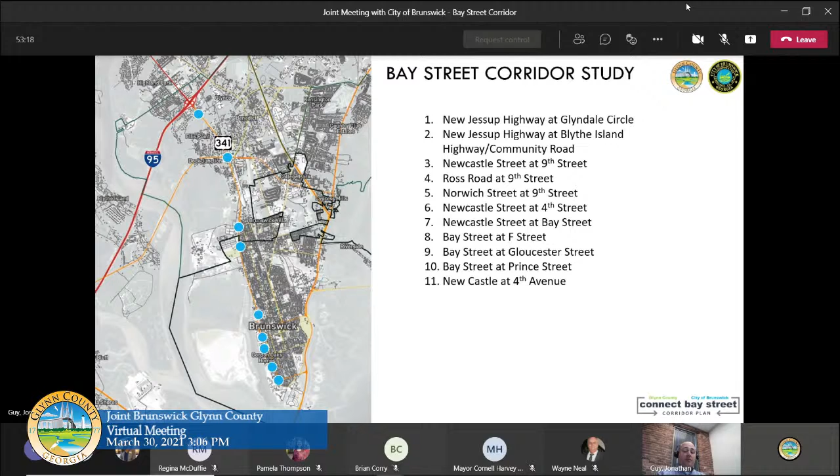So let's talk a little bit about traffic volumes. This information was provided by the Georgia Department of Transportation, based off 2019 numbers. The average daily traffic volumes range from 23,000 up near the interstate, which is not surprising considering the connection with 95, and then start to taper as you get down through the corridor as you approach downtown. You can see it's still a significant volume as it starts to approach downtown.

The volume splits at that point, which is why you see about 6,000 vehicles per day peeling off toward Brunswick. The rest is coming into Newcastle, into the heart of downtown. Then there are some smaller volumes as you work your way in and around, and ultimately coming back over to 17 where you see those volumes come up.

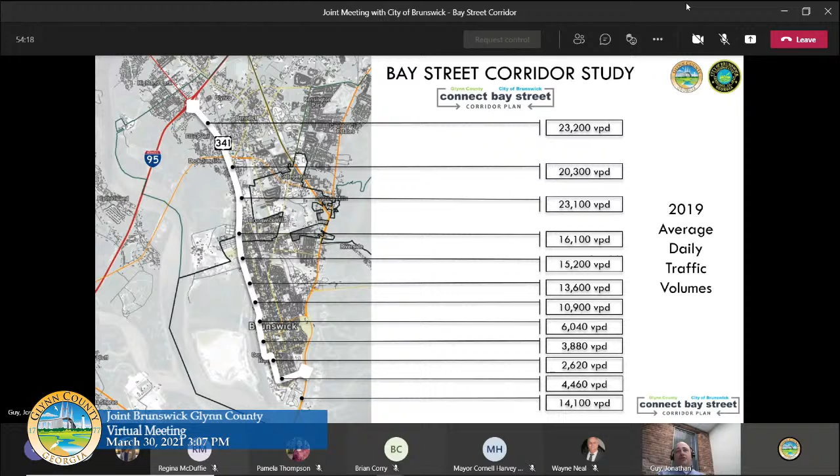A lot of that has to do with the interconnectivity. It has to do with where volumes are ultimately trying to go. Are they trying to head to the islands? Are they trying to hit the terminal? Are they trying to go to downtown? Where is their destination? That's important.

So as we think about that, let's look at some of the crashes along the corridor, because this also tells a story, as well as the volumes that are out there. Not surprisingly, remember those volumes up towards the interstate with 95 - you've got a lot of drivers that are new to the area, either just hopping off the interstate or using this to connect over to a different destination, as well as Old Jacksonville Highway as you're coming in. These two areas show the predominant amount of crashes in the corridor, but you also have others throughout as you work your way in and around. Total of 721 crashes along the corridor.

There is a very small percentage that is serious injuries. As we start to look at the manner of the collisions, it's interesting to look at what that tells us as well - rear ends are predominant, as well as left angle crashes. That tells me, looking at that in conjunction with the angle crashes, you've got congestion in the corridor, maybe a little bit of driver unfamiliarity with the corridor conditions or the laneage that's out there, but also congestion - that's the main thing you're seeing.

And those are concentrated in locations where we have observed, and the traffic volumes tell you based on operational analysis that you've got congestion at those locations.

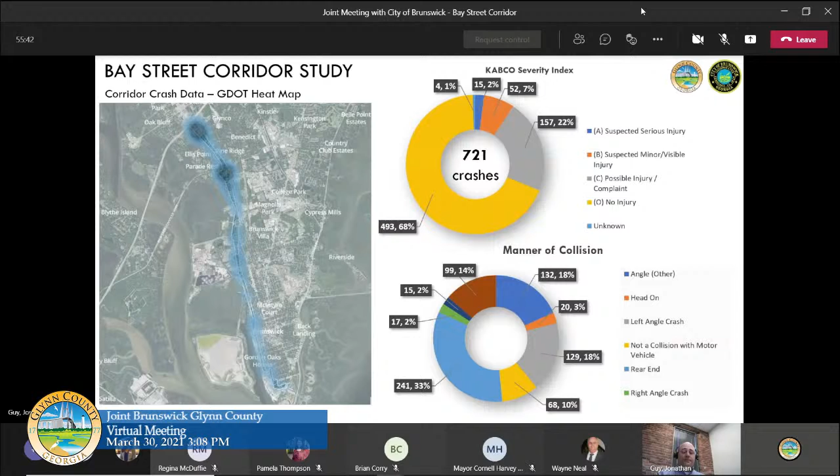As I was talking earlier about mobility through the corridor, I wanted to highlight some of the destinations or the corridor influencers or attractors that you see there. This is a mixture of different things - it includes downtown, as well as the causeway over to the islands. That's important because it tells a story relative to how people move through your network.

This is a very long corridor. It has a very broad range of context areas. We go from industrial areas - you have a port, you have a historic downtown, you go through neighborhoods. You also deal with just general business commercial corridors.

Because of that, you've got a variety of different land uses that are out there, from heavy industrial like the pulp mill, you have the terminal, but you also have other places that are drawing people in, and it may not be a singular destination - that's why I have the causeway to the island.

You've got individuals who may choose to take, if they're coming from the south, over the new bridge on 17 to connect up. You have others coming from the north who are choosing to take different connections around. All of those are attractors, but it all influences how both the crash patterns occur with collisions, as well as volumes moving through the corridor. That's important for us to understand as we talk about some of the things that we're seeing.

I think it's also important to highlight the fact that this corridor, 341, is a GRIP corridor, which is the Governor's Road Improvement Program. Now, this goes back a long way - I wasn't even a practicing engineer at that time. But if you look, what were their goals?

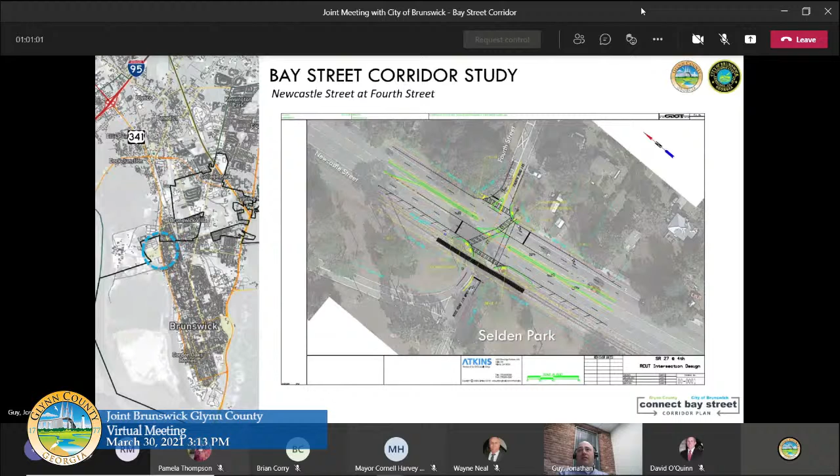I'll give some feedback and alternatives to consider. One of the first things - while the Z crossing, which you can barely see in the background here, is one way to connect people across - if you're looking at minimizing time at risk, meaning the time you are in the through lanes conflicting with traffic, I like to minimize that as much as possible. So one modification we'd recommend is to remove the left onto 4th Street. There are connections both north and south that work you into the street grid. The reason is to provide the left into the park access, but also to give individuals crossing the road, should they not make it in the time allowed for the HAWK signal, a place to pause.

Or to go all the way across and cross. It minimizes that conflict point. It makes it a more straightforward crossing if you're looking at those who may be visually impaired. A nice waiting area through here for pedestrians to stage should they need to be staged.

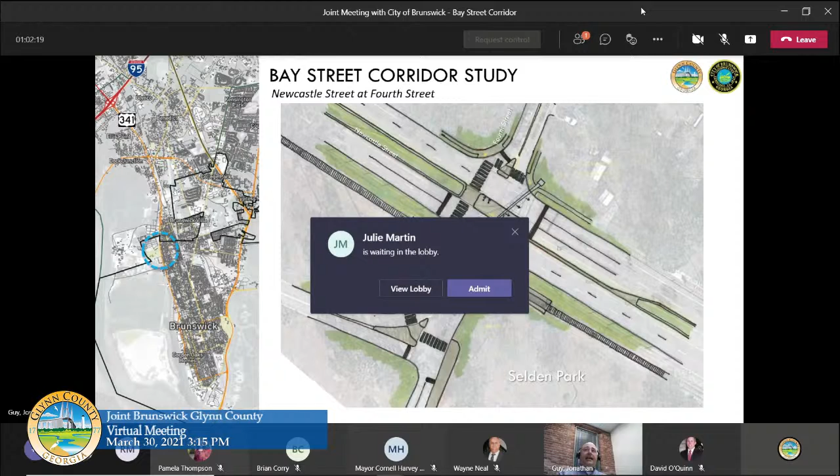I will tell you, in looking at this and looking at the traffic volumes, while we did show a little bit of delay on the side street, that is not uncommon to see on any side street where you've got a multi-lane facility. What I will tell you, though, is that the volumes do not come close to the level that needs to be there for a traffic signal. So as a part of this, we would not be recommending a traffic signal.

Now, we would look at the potential for a HAWK signal here, which gives priority to the pedestrian. It works in the same manner as a traffic signal in that you do stop traffic. So you create a safe crossing at this location. It is pedestrian activated, with push buttons on either side to cause it to go into flash, stop traffic, and then ultimately allow the pedestrians to cross.

Understanding the importance of this for the community and for the street grid, we modified this a little bit, taking elements from the GDOT plan originally, and then my recommendation, which was the straight crossing of the neighborhood. What we did is slightly modify the crossing location associated with Ross Road, bringing this intersection in a little more streamlined.

It brings the pedestrian straight across, again looking at a HAWK signal at this location to control traffic and allow that crossing. We'll be able to stop this traffic and this traffic. Since there's not necessarily a conflicting movement with the HAWK, this crossing traffic would not stop - it would be a stop sign, but not under the provision of the HAWK in this configuration. This does allow for that left turn, but it doesn't allow left turns out. I understand that for some people that may be concerning.

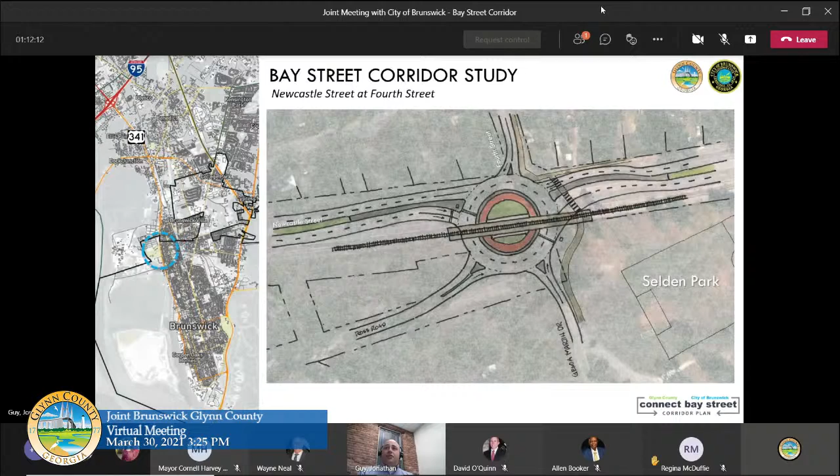Well, I mean, you just said that it would be less costly than moving it, but I understand what you're saying about the railroad, okay, thank you. Yep, absolutely. Any other questions before I'll go back to where I was at, down at Newcastle? Just make sure we answer questions. I apologize, didn't see the hand up.

All right, let me jump down here and we'll talk about this intersection. This is another alternative to move traffic. One of the things we heard in stakeholder conversations is potential development on the waterfront side of the railroad tracks over here. So looking at that, how do you provide access? How do you create mobility in between these two?

This is a quick sketch we've pulled up, and each of these two roundabouts are being formalized a little bit more, as well as the one up at Selden Park, in greater detail so it's better communicated. Looking at the potential for a crossing there, adding that fourth leg into the intersection, maintaining the mobility we're looking for, creating the gateway, creating the circulation we need. This is another way to bring it into control.

Now, this does have the same complications as it is crossing the railroad track, which brings up another level of coordination. But it also means that in any evaluation of this, if it were to go forward, you would probably look at closing the additional crossing down here if you wanted access at this location. Bringing it into the roundabout brings it into the control, also gives you an opportunity to bring pedestrians in, and you start to create this corridor on either side.

One of the things that the mayor and I had discussed at some of our breakfast meetings was being able to connect Mary Ross Park with the downtown district. And when you look at the traffic counts presented earlier in this presentation of how low the traffic counts get once you go through this split on Bay Street, is it possible that we could downsize or at least do a study about downsizing the 4-lane to 1 lane in each direction, increase parking for downtown, and provide a softscape for crossing from the library area at Gloucester Street across to Mary Ross Park to make it more friendly there?

That's a good question, and I'm going to get to that as we get into the presentation. I'm going to walk you through a series of what we've talked about, so I don't want to spoil the results. Give me just one minute. I'm going to talk about one more intersection, and then we'll jump over to that one, because I figured that would be a lot of the conversation today and essentially what our findings have been.

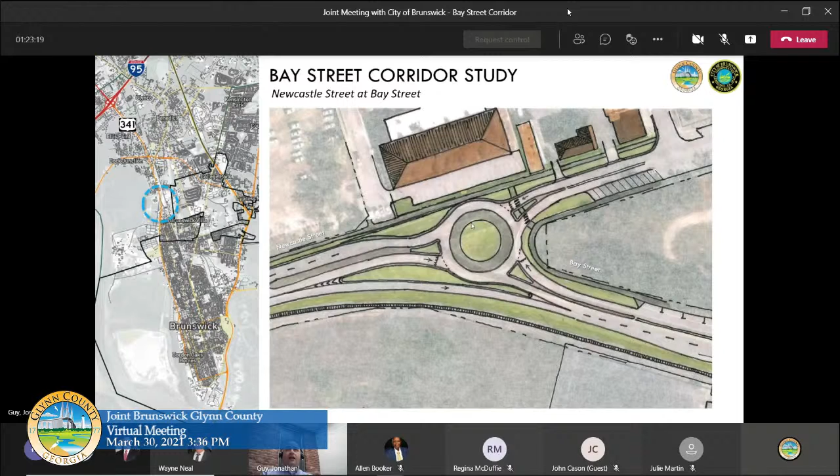So I'm going to back up and talk about this intersection over here. This is one of the polar intersections, again the terminal point to the east, the intersection of 4th and Glynn. Looking at that intersection again, it's a major parallel corridor to downtown, which is 17, intended to provide that southern connection up to the causeway to get you over. It has some very unique geometry, just like some of your other intersections.

Lefts crossing over, lefts merging with exiting traffic. When you start to look at the volumes, you see that while there's not very heavy traffic coming off 4th Avenue onto Glynn, it is a significant volume at that intersection. One of our recommendations is, because the volume on 4th is somewhat smaller than what it needs to be, it's not at this point, or in any of our projections, going to get to a point where you'd warrant a traffic signal at that location.

But a roundabout does help to provide that mobility. When you think about future connectivity of any sort of parallel boardwalk facility along 17, having access to come in not only here at 4th, but potentially to the north into downtown, connecting your residents to this, gives you that opportunity. Again, this is another one that fits within the geometry of what you've got out there.

I realize there's been some money recently spent on landscaping this location. We're not recommending this in the near term, but this would be something to look at in the future. Knowing you're going to be very hard pressed to warrant this for a traffic signal, and you're going to want to maintain a healthy speed through here, this would be a recommendation. This also cleans up some of the geometry, some of the funky lefts that come up and then back over, as well as this left exiting merging movement.

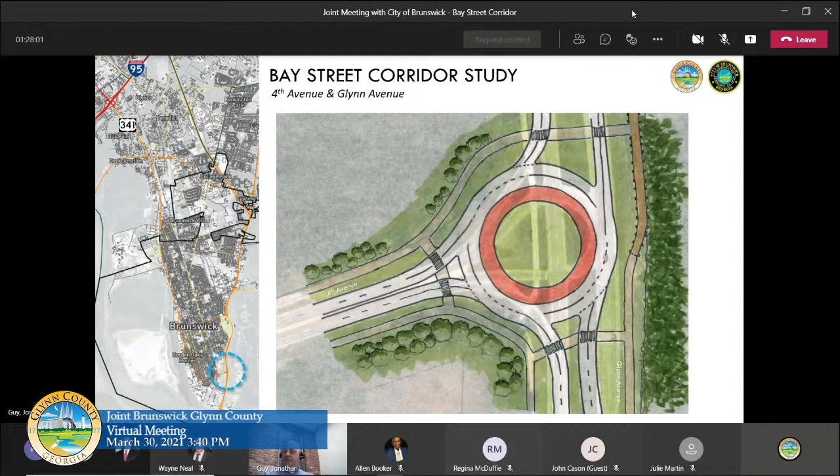All right, let's step through a couple other things, and I'll start to tell a story as we get into the downtown area, which has been brought up. So let's talk about that—Bay Street at F Street is one of the intersections we've looked at.

As you look at how that's going to grow long term, you see those overall growth volumes starting to rise through here—2 lanes in each direction currently, with an overall ADT of about 6,000 vehicles throughout the day, but still a very heavy vehicle percentage of 13.8%. That's a lot—typically for corridors not adjacent to industrial areas or terminals, you'd see somewhere between 2 and 4%. Understanding that is important because it affects operations and how traffic moves through a corridor, so it's important to consider that in our conversation today.

Talking about the next street down, Gloucester, and looking at operations—we've got a HAWK signal or rapid flashing beacon here. There's been some improvements from GDOT at this location to improve connectivity, and I was reading through the paper today about improvements being done, which was also shared with us by GDOT.

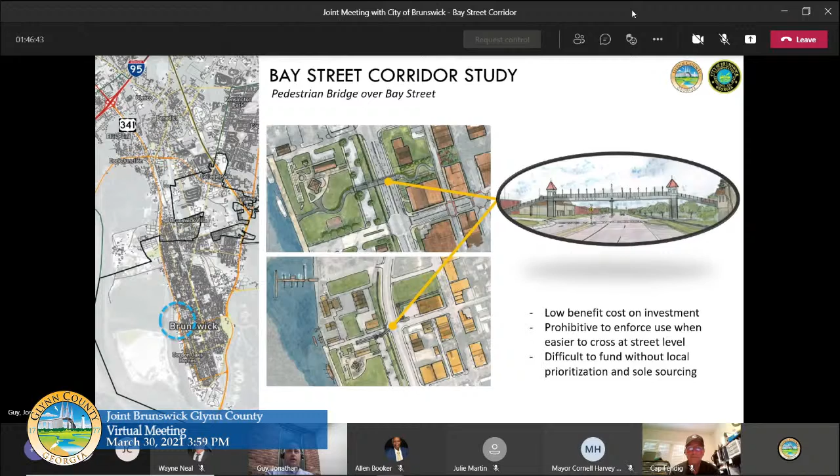Okay, thank you so much for the comments relative to that. Appreciate that. Let's talk a little bit about that. You talked about a variety of different things relative to the corridor, and we did work up concepts associated with that.

You can see a variety of different options that are shown there that look at unbalanced, balanced, multi-lanes in, single lane out, looking at the configuration. What I will tell you is, as you can see in the third bullet, there's no support at GDOT for implementation of that. And a couple reasons why: it's counter to the investment made through the GRIP program of maintaining this as an economic development corridor.

You've got the desire to have multi-lanes coming into the port. If over time the port does decide to change operations, to move, to look at other configurations, whatever they may do, I think there could be consideration for that in the future. At this point right now, I don't see that as a viable option for getting GDOT to implement, because again, we've got to remember, this is their road. They control this road. This is a strategic highway for them from a mobility standpoint. And as owners of the road, they have a say over this.

And I think that's an important factor, and I understand the desire of the connectivity. I understand where you're coming from, I don't dispute that. But I also understand the realities of where we are relative to ownership, and this is GDOT's road. I can tell you from their perspective that as you look at the corridor, we need to maintain smooth and effective operations. They see that from an economic development standpoint, as well as one of the largest generators of income for the state of Georgia, which is the Georgia Ports Authority. And so that has a say. Economics have a say in transportation.

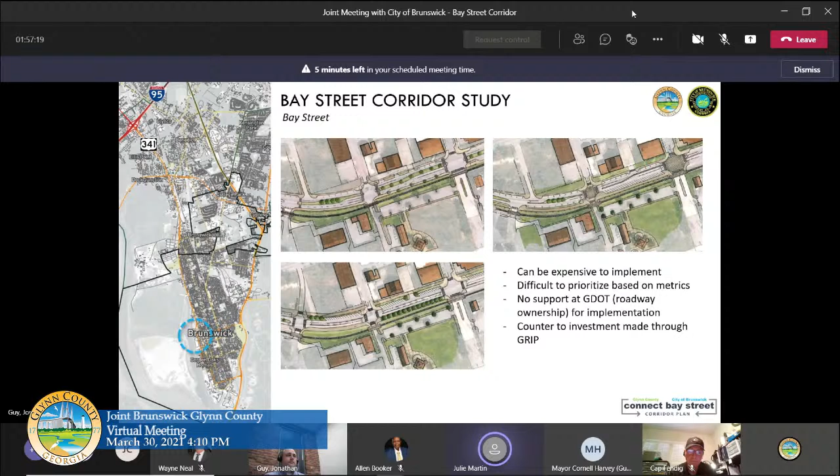Yeah, and I appreciate that. One of the other big issues we have, even with the improvements we had to push hard for—the flashing beacon lights, the sidewalk crossing over Gloucester on the south side of that intersection—once you get across towards the west, towards the park, the sidewalks do not align. So a pedestrian has to move out into the Gloucester extension, into the roadway, to reconnect with the sidewalk. That's one issue. The second issue is, if you look at the railroad crossing, there are huge holes.

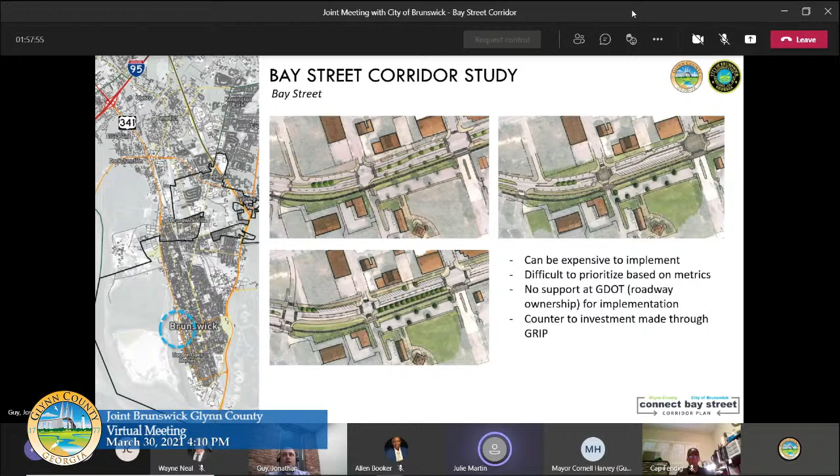So if you've got somebody pushing a stroller, a wheelchair, or a book cart from the library, which does happen, they can't navigate—their wheels are going to go in the hole every single time. It's pathetic. I think that's where, as you look at... let me get this to the screen here. I'll back that up, take that off. I realize what you're talking about.

The sidewalk actually resides right here today—it stops. As you come across here, there is some concrete, but what we would recommend, you can kind of see it here, is formalizing and channelizing this crossing, improving the smoothness of the rail crossing here for pedestrians. There are things you can do to improve that.

Protecting those pedestrians by bringing Gloucester down to a single lane exit and a single lane in allows you to make these improvements on an interim basis. This is concrete—it's easy to implement these channelized islands, and it creates that safe movement that's on grade, which is the other nice thing. There are things we can do without changing the curb right now. You could also do something more formal than this and make it grand.

But if you're looking at how do we do those interim things, which was one of the things we were charged with, this is one of the first ones I would look at doing: changing up the laneage on Gloucester on the west side. You only need a single lane, you don't need multi-lanes exiting through there. This still works for the trucks. There are some things we can do here to improve this, to create a two-stage crossing that would allow you to maintain the lanes that are out there, utilize the infrastructure already put in, but enhance it as it comes across and make a safer connection into the park.

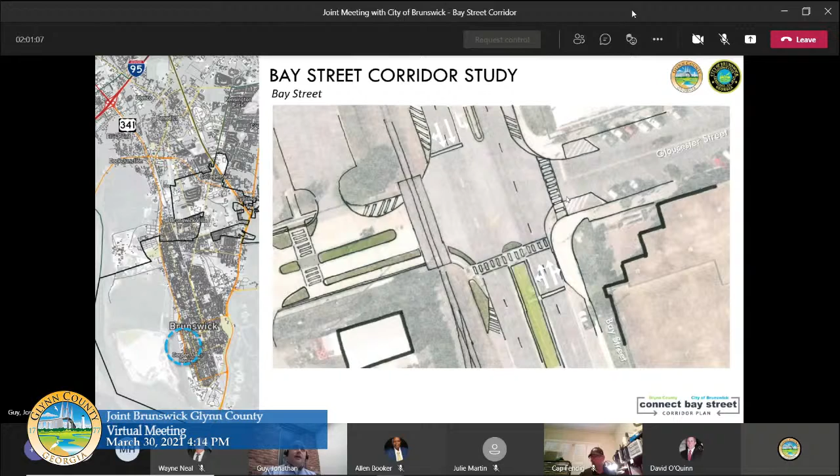Jonathan, this is David O'Quinn. Two things that were said earlier sort of struck me, and I was trying to put them together. One, you said that GDOT really doesn't want to see much change on Bay Street, if I understood correctly, because of previous investment towards economic development. Is that correct? Well, if you look at the priorities associated with the GRIP corridor, I'll go back to that original slide.

Oops, sorry, don't want to make anybody.

My question is this, and Commissioner Fendig spoke to it. Things change. And if we're talking about economic development, it's an important imperative that the downtown area of Brunswick, which could see significant economic redevelopment, have the opportunity to cross over to that park, because you've got lofts coming in downtown. It would be a great amenity for people living down there to be able to cross across the street safely, which is a draw for people down there, which helps bring business and whatnot. Why would that not be considered economic development? And if we're looking to make changes, why wouldn't that be considered?

Well, I can't speak for GDOT, and I'm basing this off of looking at their programs. If you look at one of the main elements in the corridor, that is the port. We can debate the health of that, I'm not an expert, so I'm not going to speak for that. But as they look at it from a statewide perspective, the port does provide a tremendous economic impact. It may change over time, absolutely, and I understand what you are saying as well. This is the intersection of local and state objectives, where you've got ownership of a roadway, other state entities like the port, and then the local side of that, and it's not an easy path to navigate. It's not because you've got different perspectives relative to that, different ownership, different requirements. The fact that this is a freight corridor is really important, they are charged with moving freight efficiently, and it's tough to do that when it's a single lane. Maybe there's additional conversation that needs to occur with GDOT relative to that. Again, I'm basing this off of the metrics.

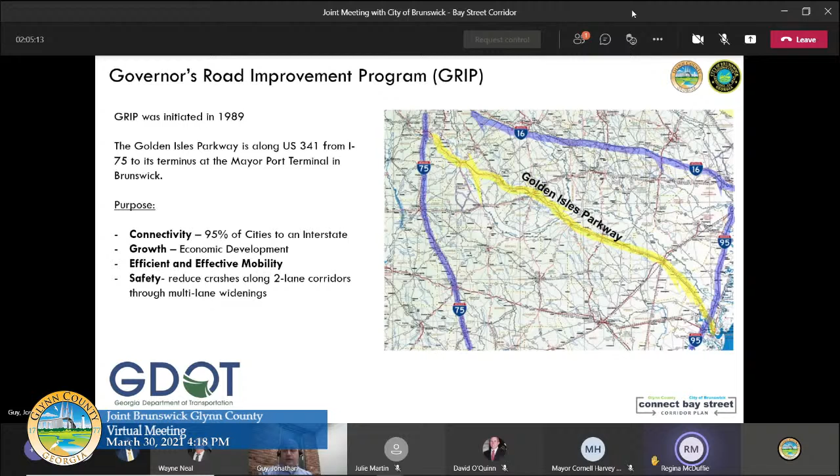This is Ms. McDuffie. To the point being made, keep in mind, when you talk about economic development for the state of Georgia, tourism is number 2 after agriculture. So I think we should keep that in mind and put that in the minds of the people we speak with. Very good point.

Let me jump to the concluding slide given the time we've got. Next steps: just heard another action item, we'll add that. We're going to refine this, take your input, coordination with GDOT. We've got a meeting coming up in a week with the BATS, the MPO, to give them an update, and then we'll have follow-up conversations with each of you. I'll come back to you in May. We'll be developing a final report and then a final presentation in June. That's where we're headed right now. Any questions?

I'd like to thank you for the presentation. It gives us a point of conversation, and that is what we're working toward. From the county standpoint, working with the city and seeing what we can do together to move forward. So I appreciate it, good information, and we'll go from there. If anyone else has anything, please jump in.

This is Mayor Harvey. I think you're right, Chairman Neal. I think as we move forward, we'll be able to do some things that are best for our community. Realizing the state is looking at the overall state, but we still have to live here in our community, and I think we can find agreeable points and make things better. So I agree with you 100%. Thank you, Jonathan, thank you very much.